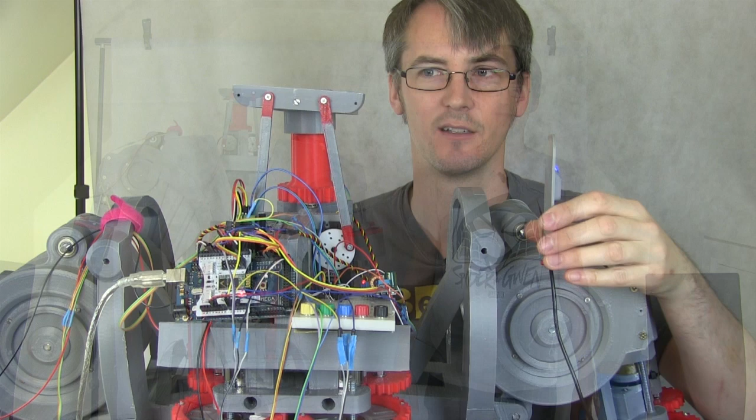This Ultron project is a real robot which actually moves with motors and electronics. It's going to be partially driven by a motion capture suit, but with its own AI in the middle, so it'll only respond if it wants to based on sensors from its environment, making it quite socially interactive. Have a look back on the previous parts to see me making the head and the arm move with one of the motion capture sensors.

That worked out pretty well, so you can imagine what it's going to be like when it's all in motion. I was going to do some more parts like last time, essentially cosmetic parts that fit in under the arm and some of the conduits, which are going to carry cables.

So again, those are practical cosmetics like the parts I built to house electronics last time. But I've actually decided to give that a bit more thought. This time I'm going to work my way up and try and put the head on, or at least try and design that, and that's going to be quite interesting.

There are some facial features in the movie that Ultron has around its lips, so it can move its mouth, its jaw, and also its eyebrows. It doesn't have too much else. But I'm going to attempt to make some parts that are flexible, printed in NinjaFlex, so we can try and put those features in.

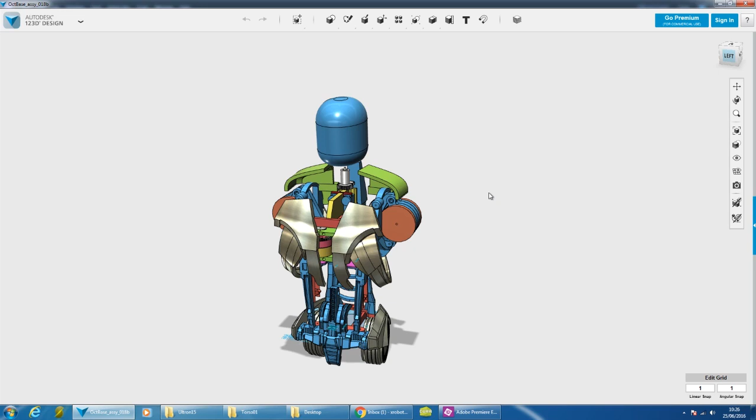We're going to look at the head, so basically this is the placeholder I had for the head. It's a bit big for Ultron's head - Ultron's head's a bit of a pea head really, stuck on quite a long neck. But I'm going to start with that to actually plan what the head is going to be like, and probably use this part and cut it up to try and make it shaped like Ultron's head.

Now I'm using Autodesk 123D Design, which is free software. It's not particularly good for surface modelling - in fact, you can't really do surface modelling. It'd be much better to model this in Blender or something else, but I'm going to try and do it in this because it's free and I know how to use it, and Blender is quite a lot to learn.

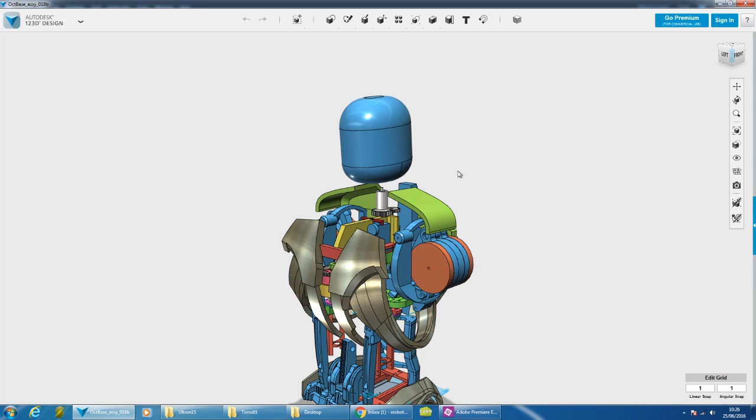Here's the head on its own with a bit of the mechanism underneath it. So this is the gimbal, which allows the head to rotate in all directions, and obviously it's on a rotating thing which is controlled by a motor at the back.

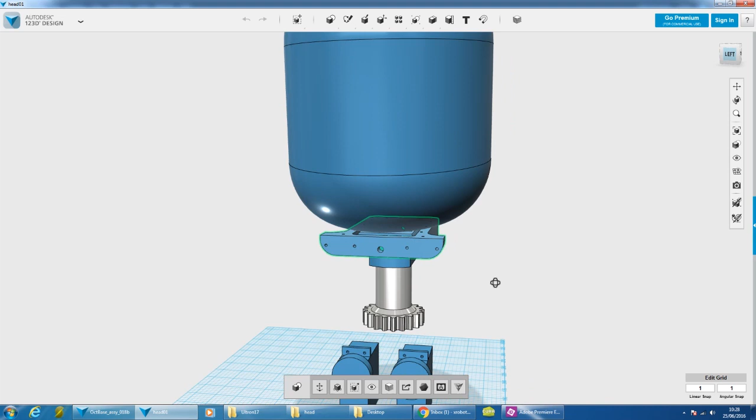So that's already looking a bit too big for the sort of chin and neck there, so this piece is probably going to get removed and made a bit smaller to match the actual head cosmetics. But I'm going to start with this shape, as I say, to try and model the head.

Here it is, so I've just dropped that to the ground and levelled it up. It was angled forward slightly in the main piece of CAD, so I can start chopping pieces out of it. I've subtracted some parts, so this main face on here, I just subtracted a sort of curve piece that I made by getting a sphere and cutting it up and shelling it out.

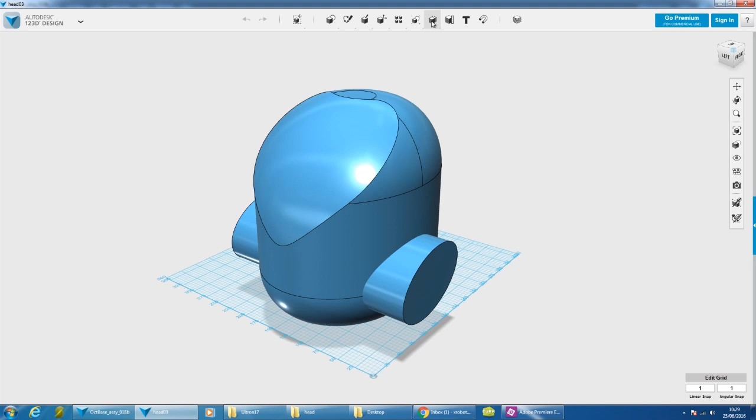Similarly, I'm going to subtract this part by using the subtract tool. So we'll just click on this and then click on this and press enter, and that removes the part. And we can do that to carve up the main piece there.

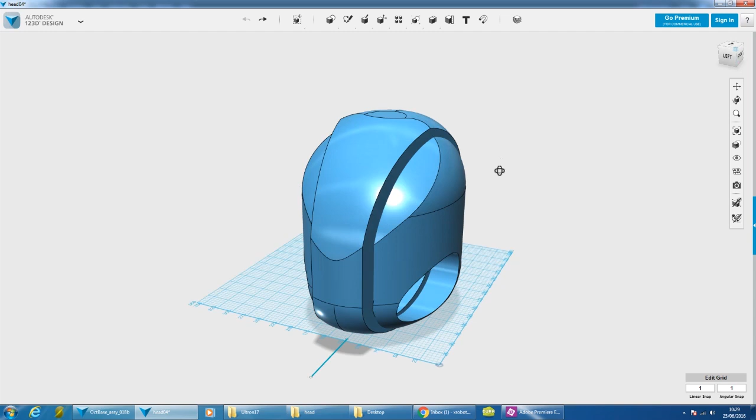So I drew some lines on the ground plane like this one and some others and split this up, so all of these are individual parts now. So I can try and get some better contour, and this central column, which is a bit like the shape of Ultron. Some of these bits need moving around and aligning, and eventually we'll split it up to make the jaw.

I've drawn another sketch on the ground plane, which is this one, and then just rotated it around so that I can get it at the right angle, and I've used that to split the solid using the split solid tool, and that's allowed me to cut this piece out.

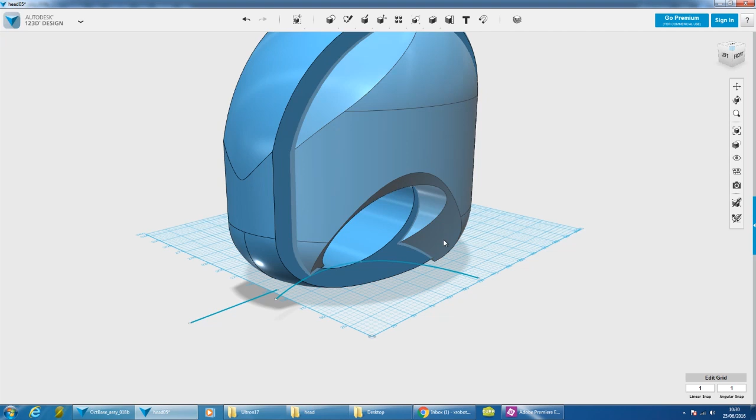And then I've just done a chamfer using the chamfer tool by selecting the edge and selecting a chamfer amount there, so we can go and contour up all of these pieces. And we're starting to get the look of Ultron there a little bit, I think. At least it's looking more head shaped.

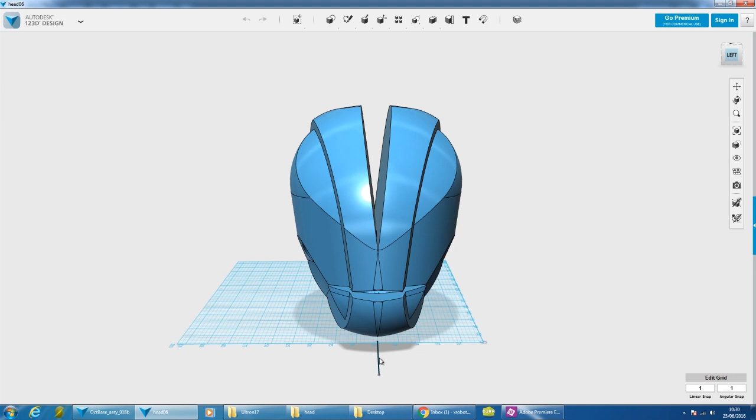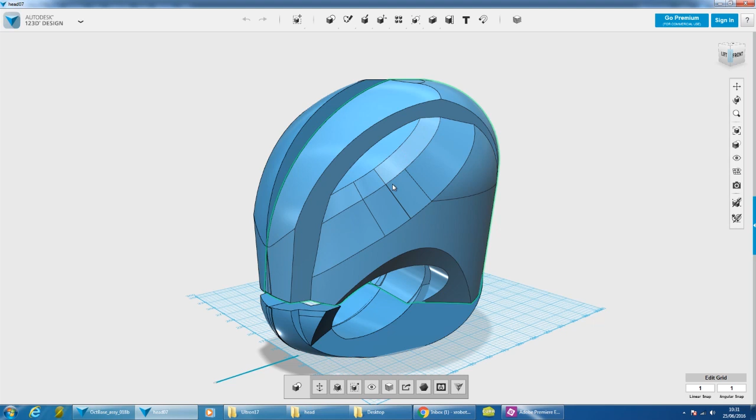I've now divided the head into 4 parts by drawing sketches and splitting it up, down the middle and also on a horizontal plane. Then I've taken these parts and rotated them slightly to try and get the right shape, giving a wider head at the top and a smaller jaw. I've then used the chamfer tool again to chamfer these edges to get some nicer contours.

Already it's starting to look a bit more like Ultron, I think. I want to fill in the gap in the middle, so I've put this extra object here and used the project tool to project this edge onto it. We can do that by selecting project, selecting the face, and selecting what we want to project, which draws a contour onto this piece. You can see that in green there.

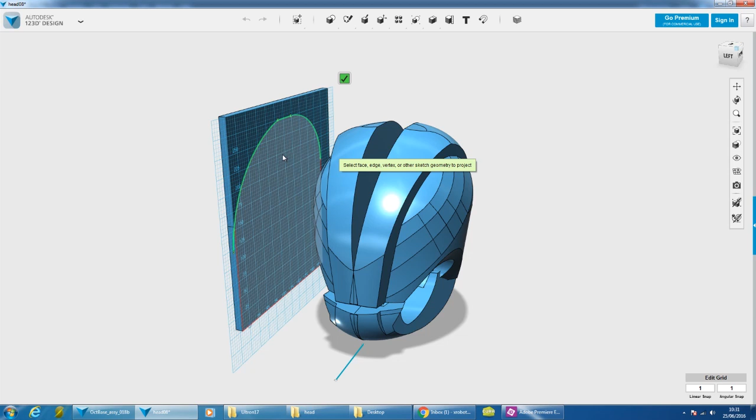I've then used the split solid tool with the green sketch to split the solid, allowing me to cut a piece out that perfectly matches the contour to fit in the middle. I made that piece a bit wider, then basically tried drawing a sketch along here and adjusting it many times to cut this out.

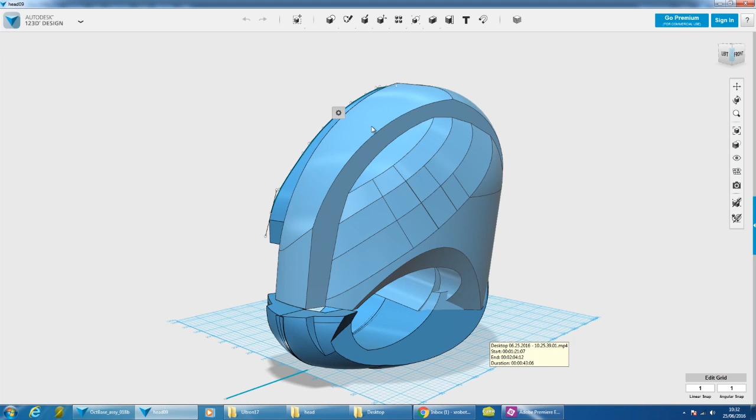I want to cut a piece off the top of the outside parts, so I used that sketch drawn on this straight plane in the middle, splitting the solid with the sketch and doing this multiple times to cut a piece off and then deleting it, through trial and error again and again trying to contour the front of the face correctly.

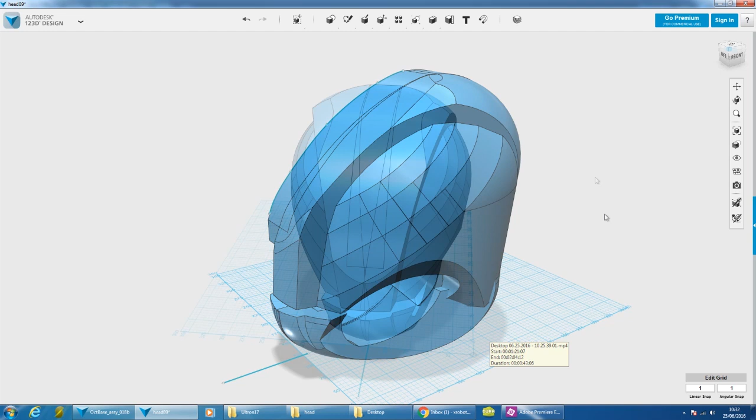I think I've got the right contour there, and I've done the same with that middle section, so all of those match, meaning I can merge them in. I've also put an extra chamfer down the side of the face.

I've done some further changes, and I think I've got roughly the right shape there. We've obviously got the separate jaw part, which I've coloured in separately. I've done a bit of scaling on that and added some bits and pieces.

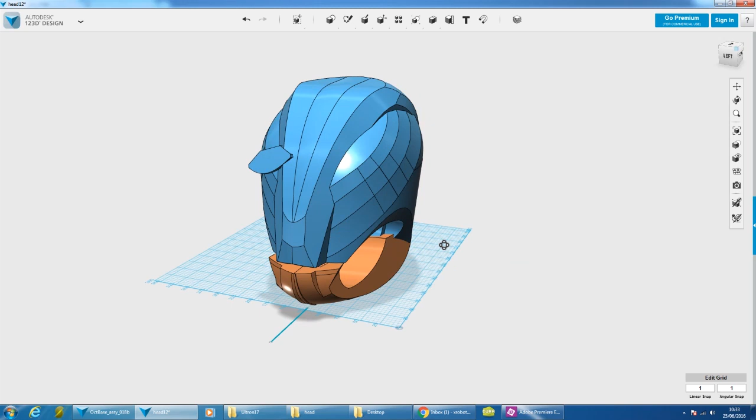We're now going to try and cut out the eyes and put the features around those eye sockets. So what I've done here is drawn this piece, and I'm going to stretch it out and try to locate it, then subtract that from the main structure to make the eye holes.

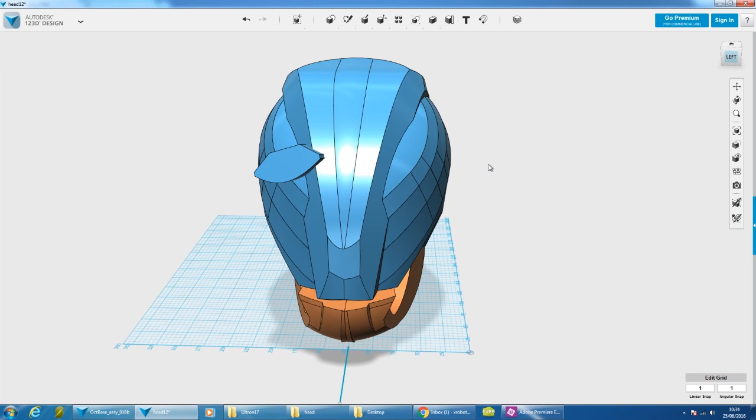Obviously this takes quite a bit of messing around. I'm not particularly good at freehand sculpting, so I've looked at quite a lot of reference pictures and tried to just rotate this around and get it in the right place to make the eyes.

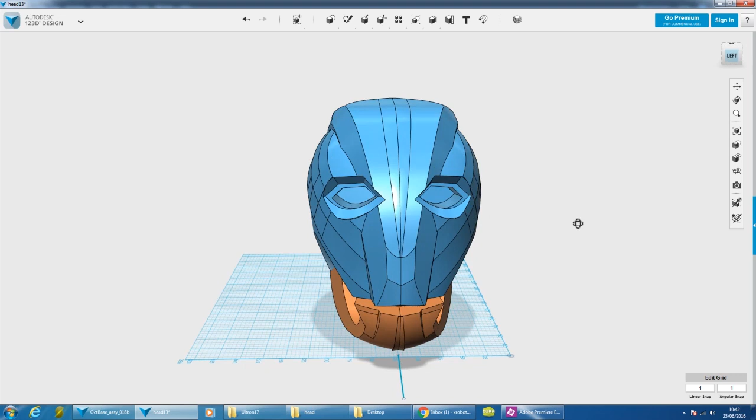I think those are probably in the right place, and I've subtracted a bigger piece as well and also chamfered some of the corners to make the bigger eye socket, so we've got that really narrow part in the middle followed by a bigger eye socket that gives more contour to the front of the face, and we could further contour those as well.

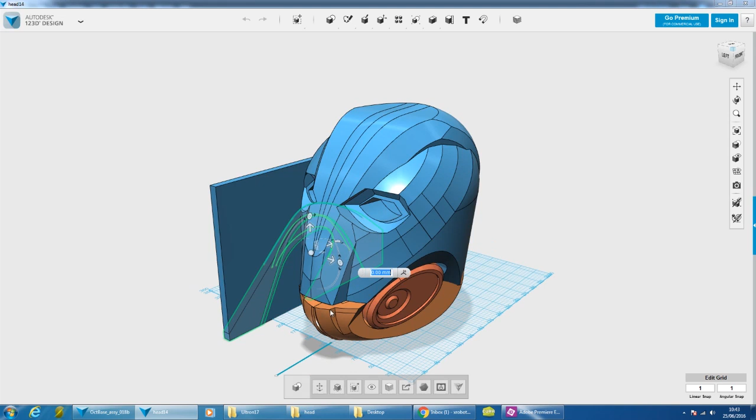I really want to put some parts on the cheekbones, which are going to set it off and give it that Ultron look. So what I've done here is again projected some of these lines onto a piece here, and then I can take this, move it over and use that merged in, moved around and put at the right angle to make up a bigger cheekbone part.

Here are the pieces I decided to keep and merge in, and you can see they very much match the contours I already have on the face. Obviously I can mirror this to both sides using the mirror tool, so it's starting to look a bit more like Ultron maybe.

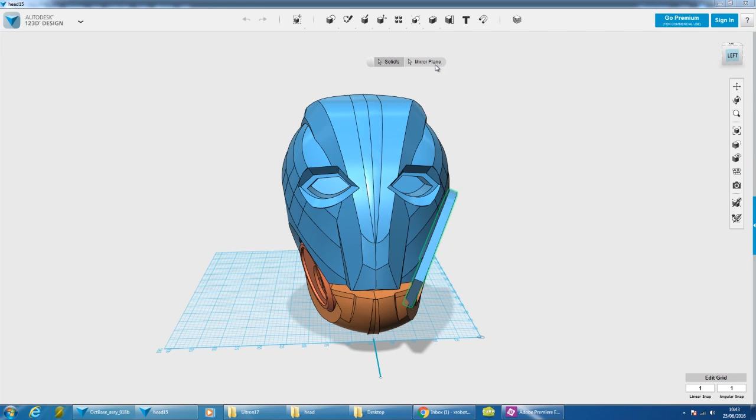It looks a bit funny in the mouth at the moment, but we need to further mess around with those by making them bigger and smaller and probably adjusting the angle of them to try and get that to be the cheek scoops that we can see.

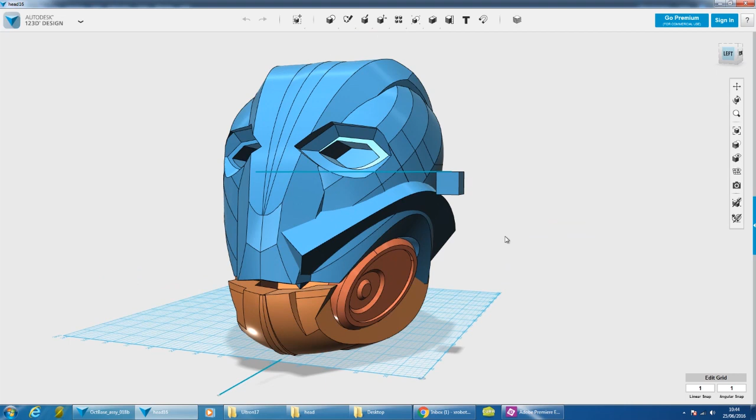So I've positioned that as best I can. It probably needs some further tuning, and then I wanted to try and contour it better to match the face. So what I've done here is just put this cube floating in mid-air so I can draw a sketch on the top plane, looking down from the top, and then try to cut this. The problem I've got is that of course it takes the sharp edge away.

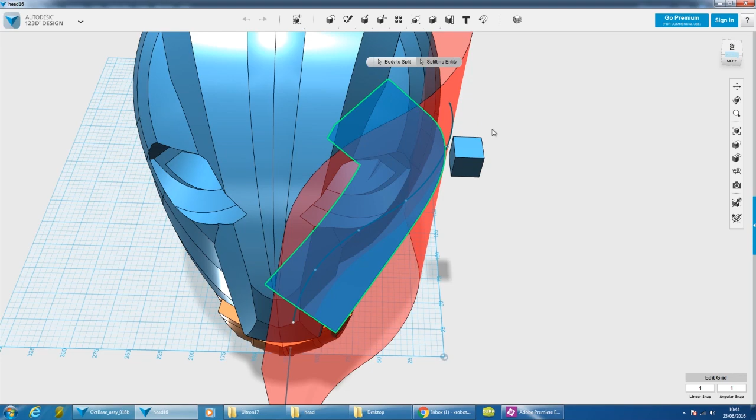If I cut a piece out of it and delete it, I don't get the right shape anymore, so in the end I decided to just scale it and position it and keep that sharp corner. I've also rounded off the back by using the fillet tool to take away that sharp edge so it matches the contour of the face.

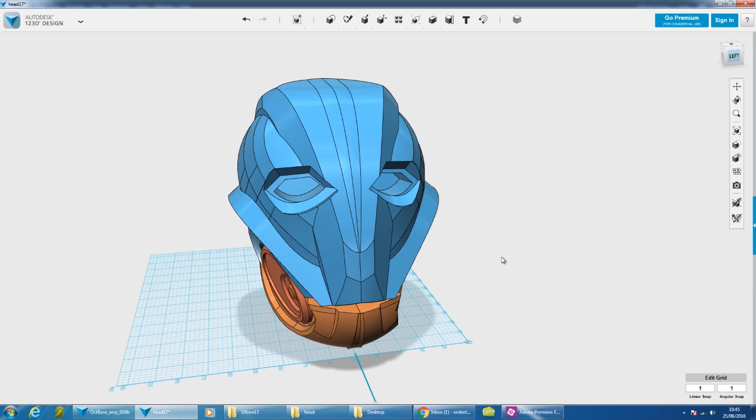I think that's now looking quite a lot like Ultron, or something that lives under the sea - I'm not sure, it looks a bit like gills. So I've put this block down and drawn some circles, and I'm going to cut away a piece here and put the sides on, which are basically Ultron's ears, and I think that's really going to set it off.

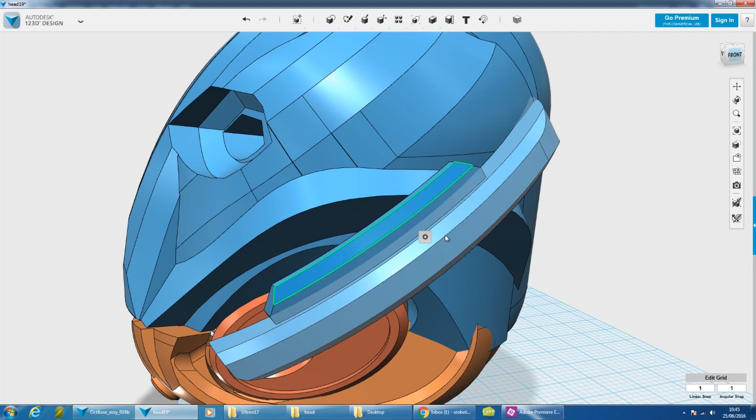After quite a lot of messing around and chamfering edges and contouring things, there's another corner I've cut off using the fillet tool and various other things. I think I've got these positioned right - I'm pretty sure I've got something that looks a bit like Ultron.

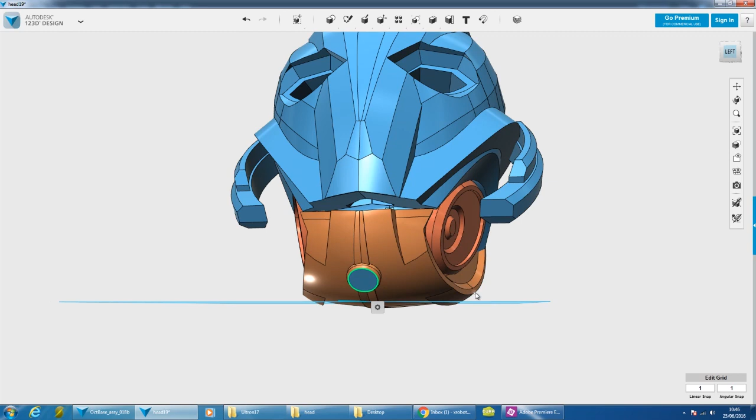That says Ultron to me now, especially looking from the front. If you can imagine its mouth opening, I've put this little circular thing in the bottom it has, and various other things. We can see that's looking quite a lot more like Ultron now - I think having those ears on has really set it off. The back still needs some more attention, but pretty sure we've got Ultron now.

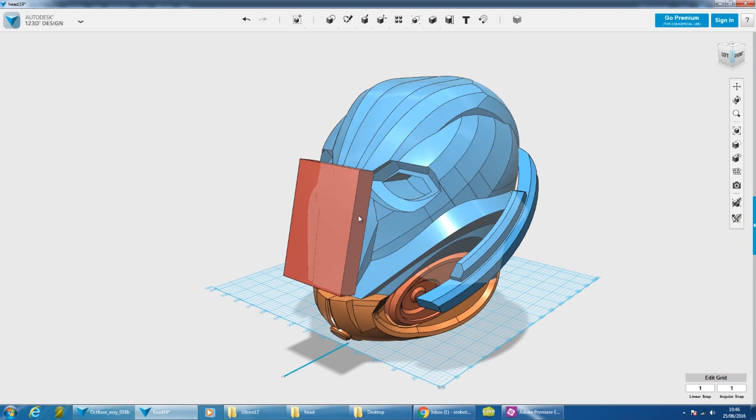I think the nose is a bit pointy and sticks out too much, so basically I've got this part which I'm then going to subtract using the subtract tool again, and we can make his nose a bit flatter. I think that really looks a bit like Ultron now.

I've repositioned those a bit and also messed around with the nose a little bit more. Pretty happy with how it looks so far.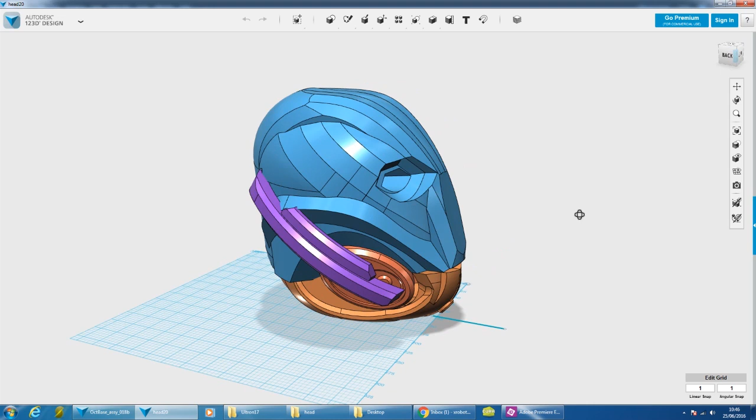I think we should put it back onto the main piece of CAD and see how well we can scale it. I thought before we do that I should make it all a nice colour, so if we go to the materials thing here, we can basically make it into different types of metal. I've chosen stainless steel, and I've also put some separate bits coloured red in the eyes. So yeah, that definitely looks like Ultron now to me.

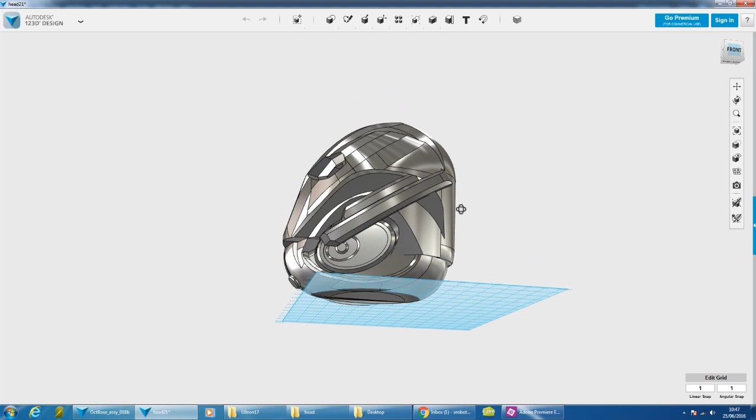I've reinserted that back into the CAD we started with so I can try and scale it. I'm not sure, it's really hard actually to decide what size it should be - I've brought it down by about 3% from what I started with.

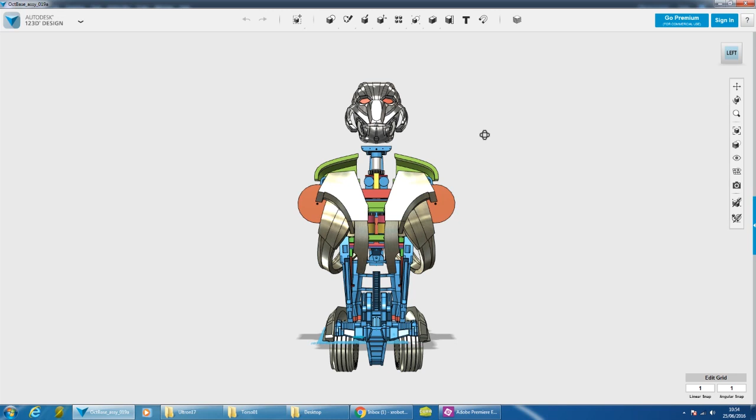So as I said, Ultron's head is kind of like a pinhead on a very long neck. It does look incredibly high compared to the arm joints, but actually they are pretty low, and there's a massive shoulder bell that comes over those on each side as well. And Ultron's head is kind of up on this thing supported by conduit and stuff. Compared to the back chassis, it's about the right height compared to reference pictures I've found and so on.

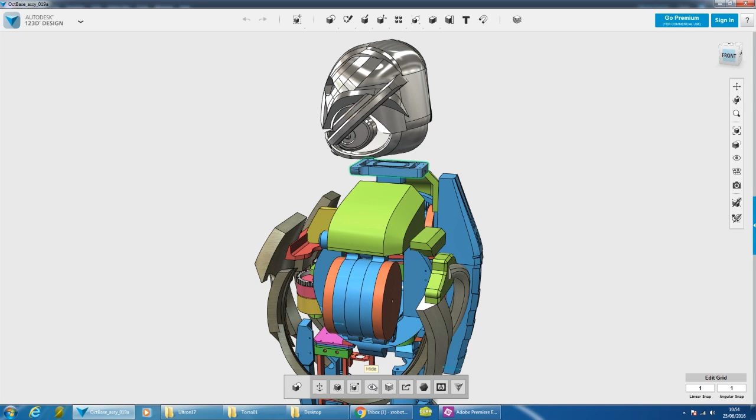Now you have to bear in mind this gimbal thing won't be here. There are conduits that run down either side of the neck and a thick neck in the middle, so at the moment it looks a bit like it's floating there in space, which it is, but obviously there'll be supporting neck parts, and the parts in the front here, the clavicle, and other various parts that fill in this massive hole in the front of the chest.

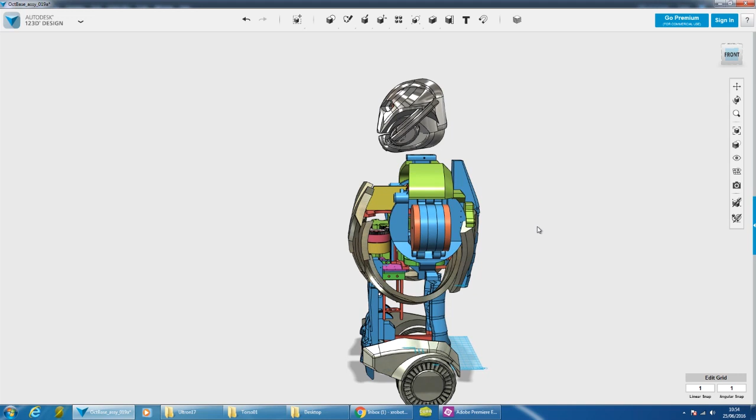Now this Ultron robot is sort of slightly wider front to back than it should be due to the arm mechanism, so it looks a bit underwhelming from the side, although I think its height is okay. But from the front, if you look at pictures of Ultron, I'm sure people will disagree and say the head needs to be slightly bigger maybe, but I'm pretty sure I've got it just right there, and that's the size I'm going to proceed with.

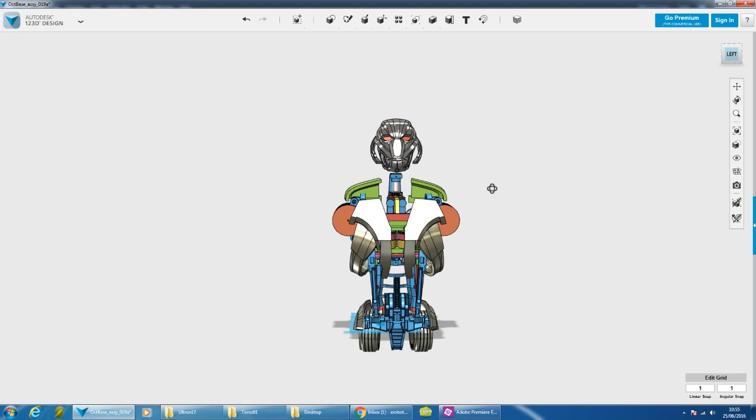I think obviously it is quite thin, but with the kind of earpieces on each side, if you take into account that width, then I think actually it probably matches. Although if I look at it with fresh eyes, sometimes it looks a bit small, but then if I look at reference pictures again, it is quite small, so I'm going to go with this size.

So here it is back with the neck gimbal mechanism, and as I say, this outside part is going to go. I need to retain the two holes that are closest for the pivot points that go to the servos.

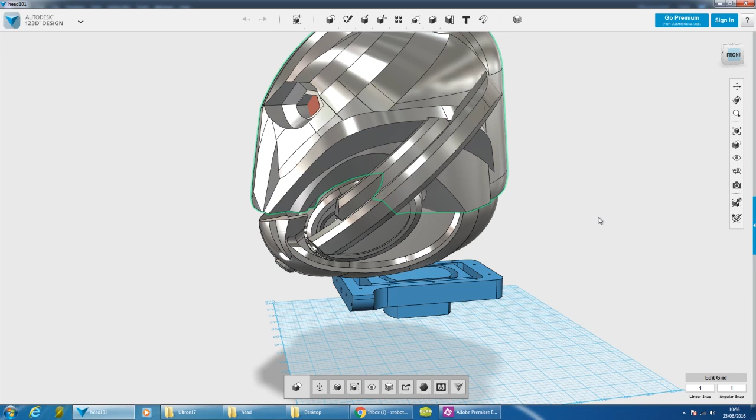The outside ones are not used, so that T-shape can be reduced. What I need to do is make sure the jaw can move up and down around this. So the gimbal and the neck need to be attached to the top of the head, otherwise its head is going to flip up and down as the mouth opens, and the jaw needs to move down around this.

So probably what I need to do is preserve the hinge points and the pivot points, get rid of that, and then build a piece that attaches to the top, once I've hollowed it out, that actually gimbals around this piece. So now we need to turn this into a mechanical assembly that works, work out where servos and things are going to go for the jaw, and also which parts are going to be printed in NinjaFlex.

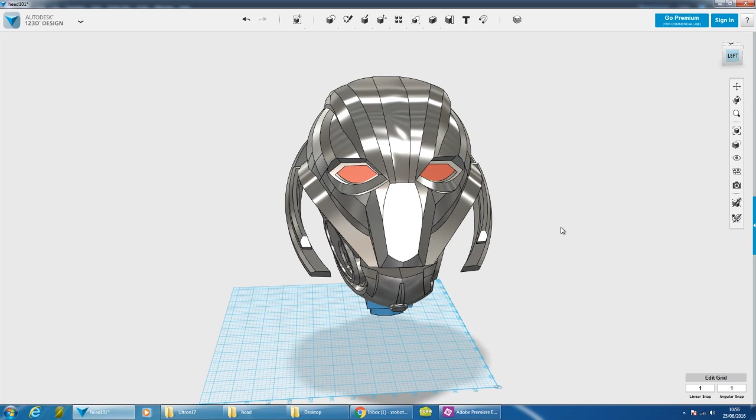There are quite a lot more dividing lines in the face, so we need to make sure the top and bottom lips can move and flex, and hopefully around the eyes, those sections, or at least some eyebrows that can move, even if there are splits in it and those parts move independently, so we can get some facial expressions.

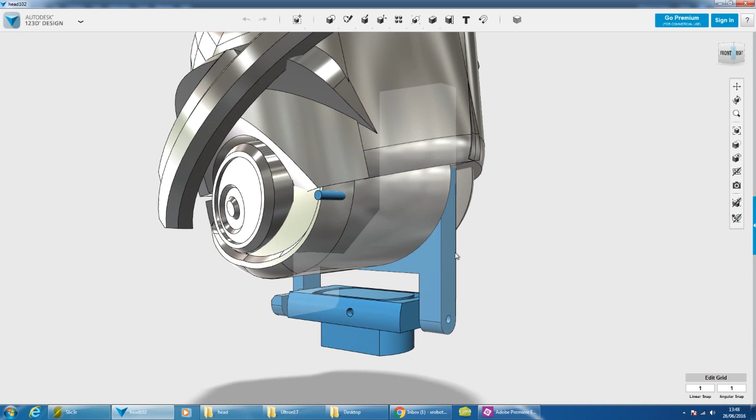I've started by sorting out this jaw hinge mechanism, so I've replaced the outer gimbal with this blue part that goes right up inside the head. That'll be fixed up in the top of the head, and I've now got a slot in the bottom of the jaw here so that the jaw can hinge around it using this blue axle as a pivot.

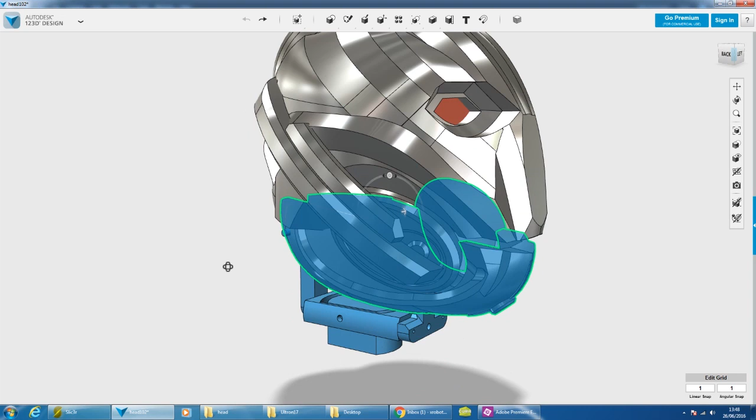So we can simulate how much the jaw can open by using Smart Rotate, by selecting that face to rotate around, selecting all the items we want to rotate, just getting all of them, selecting the axis, and then we can say put in 6 degrees, and we can see that jaw drops down.

I think that's enough for speaking. If I redo and undo, we can see the motion there. It can shut a bit more than that as well, so I think that's going to be sufficient.

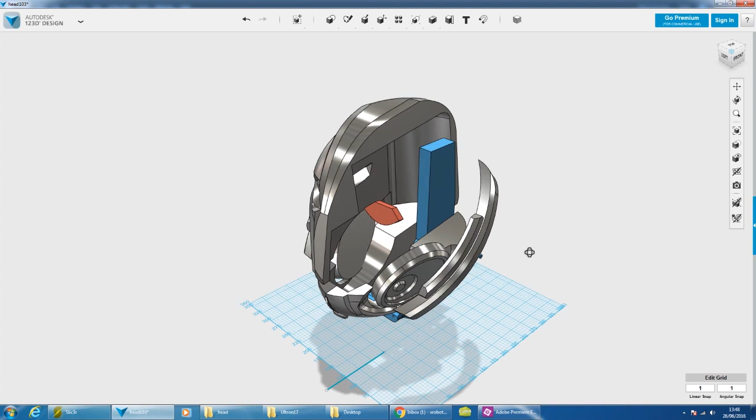I've now split the head in two so we can see inside there, and you can see I've hollowed out the middle, and I did that by subtracting the jaw and then pulling all those faces up. It was a bit of a challenge, but I got there in the end.

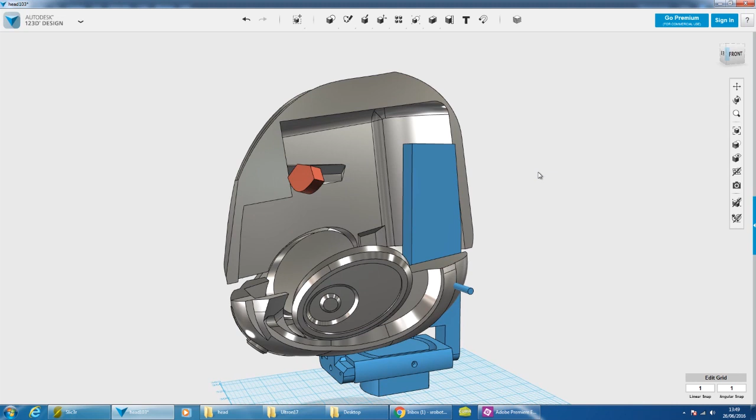I drew some other sketches as well and cut round the eyes there, otherwise we end up with really big eye sockets and don't preserve these faces. So we can see there that the blue thing runs all the way up, so I just need to make a cap to sit that on so the top of the head can push down onto it.

I've now put an extra solid piece in the back of the head there, so obviously this will be in 2 halves, and this thing will slot into a cavity so the top of the head can literally lift up and be pushed back down onto that, and as I say, the jaw will hinge around it as well.

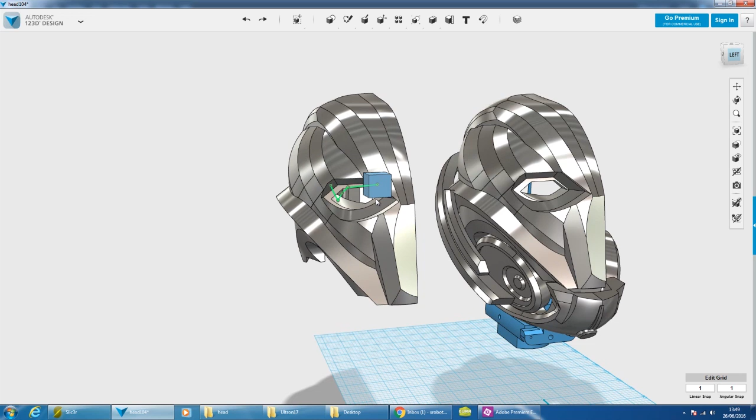I want to cut out the eyebrows, so what I've done here is made a copy of half the head, and then I've again projected some of these lines onto a plane here, and I'm going to use that to cut out a piece to make an eyebrow that's going to be animatronic.

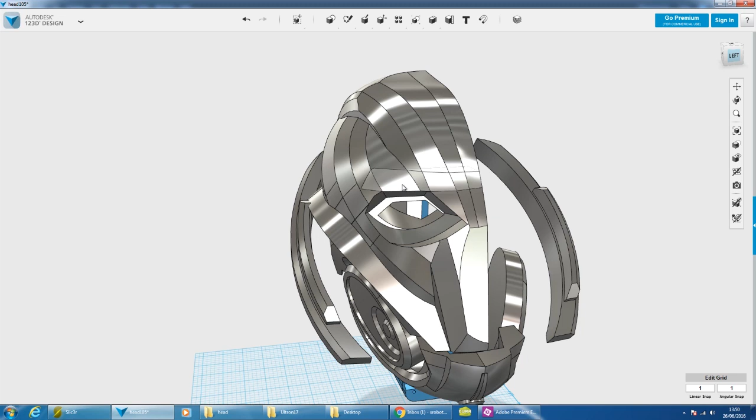Here's the piece I'm left with, which of course perfectly merges in here, if I can get it in the right place, leaving me the eyebrow shape. So what I need to do now is subtract that from the main head and then keep a copy of it, so I've got a piece that fits in a hole in exactly the right place.

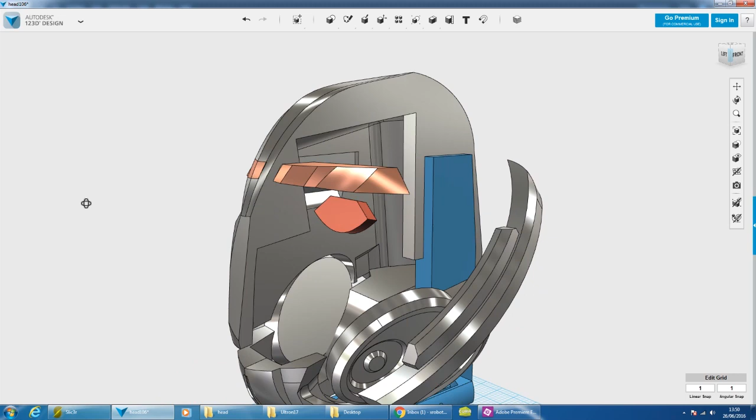And here they are. I've coloured them in a different colour, but obviously they'll be the same colour. And if I hide half that head again, I've actually got a channel in here where we can get a servo in to push a rod up and down, so I think the middle of those eyebrows are going to be fixed and the outsides will flex outwards, and they're going to be printed in flexible filament like NinjaFlex.

So I've just coloured those a more sensible colour. They're silver or some other metal off the materials menu, but at least we can see they roughly match, though they're separate parts. I've also done the same thing with the top lip now.

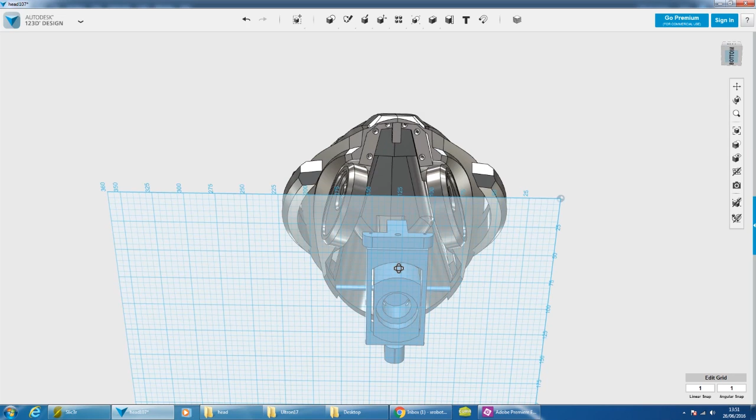So this is again going to be flexible and pushed in and out at the middle by a servo. So if we just get rid of the bottom jaw, we can see in fact I've left screw holes here, so I can screw this piece in and that will match screw holes in the top jaw.

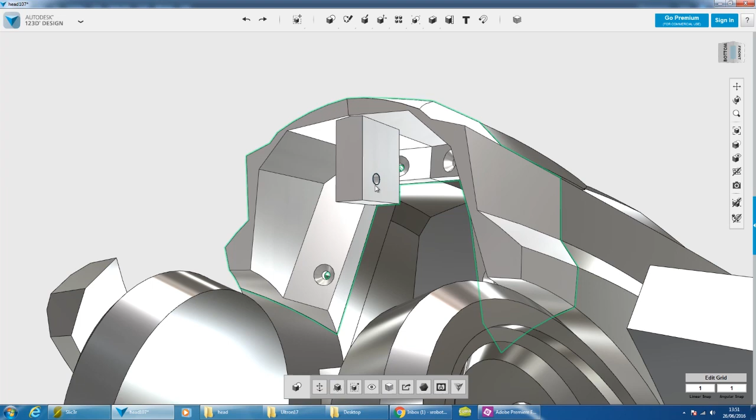So I can actually print that part separately and then attach it later, and if it's not thick enough or thin enough, I can experiment and adjust it so it's flexible enough without reprinting the whole thing, as a hybrid print. There's a hole here which will probably get adjusted for the servo to push and pull the middle of the lip, and I've done the same with the bottom lip as well.

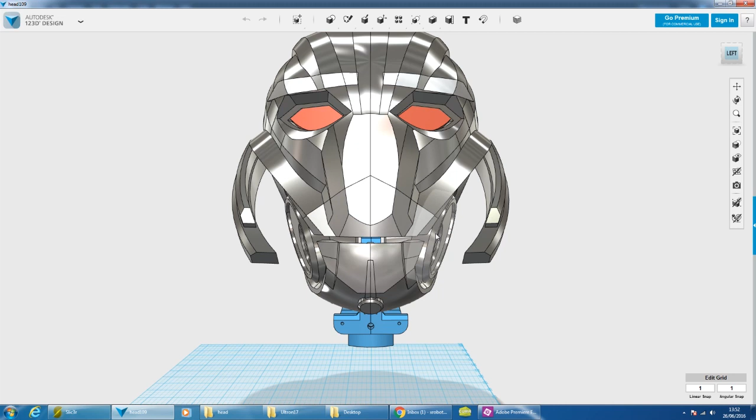So let's get rid of the top of the head, and we can see we've got a similar arrangement with a servo point and some screw holes that screw through into the bottom jaw. I've just adjusted those lips so they're flat. That's for two reasons: one, so it looks more like Ultron, and the other is so I can print those parts flat on the bed.

I've also made some minor adjustments to where the servos attach. You can see I've now got a variety of holes in there, and I've made these things slightly shorter, especially the back one, so the servo point is nearer the lip and this whole block isn't sticking out as much.

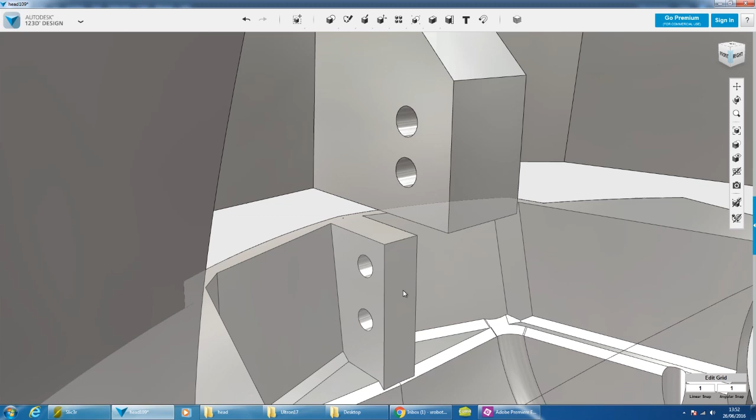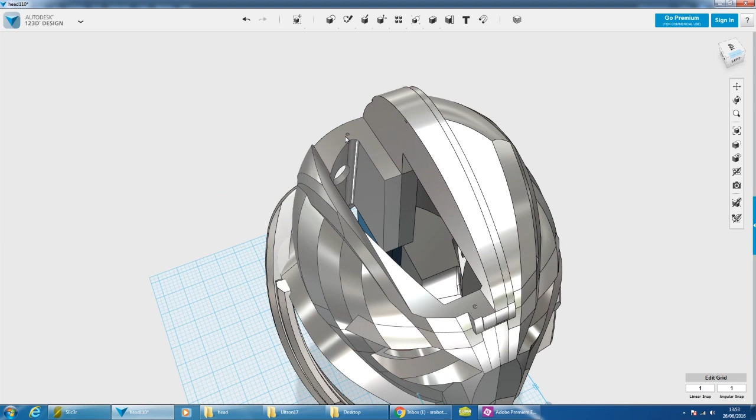Ultron has two red lit sections that contour the top of the head, so what I've done is cut off the top of the head, leaving a channel - you can see one here. It's about 6mm wide, so I can fill it with red LEDs or something else to illuminate it. That means I can lift off the top of the head to get inside. I've allowed some pegs here to align it so it just pops back on, and also illuminate those channels.

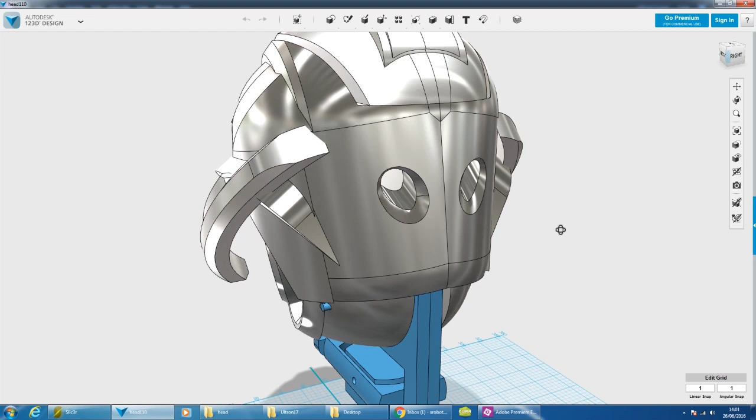Around the back of the head we're going to need another panel, a bit like a mullet, that basically matches the spine contour as the back pieces come up on the back of the body. For now I've just left two holes here so I can get cables in, possibly some conduit can run in there. Haven't really decided how it's going to look yet, and that's for access to the electronics. So there will probably be a cover over those, or some other feature that hangs down the back.

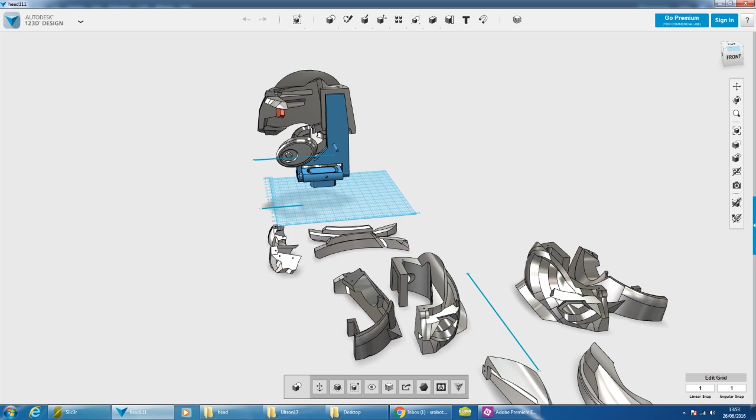Printing this thing is a bit more of a challenge, so I've actually cut the sides of the head in two, to get two flat surfaces. I was going to print the two sides with the inside faces facing the print bed, but that would have meant loads of support material to hold it up. So instead I've decided to put an extra seam line in and print the top and bottom of the head separately. That's the very top of the head, and over here we've got the jaw, which again is cut in two to give flat surfaces.

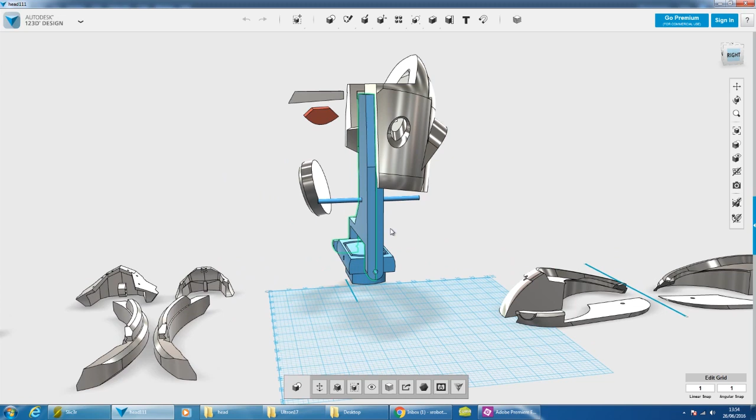We've got the NinjaFlex parts here and the ears which I've added on. I've still got to do something about the mechanism, which is in blue, to print this extra gimbal part, but again that'll be printed in two parts, so they're both flat on the bed and any warpage gets taken out by the two being attached together.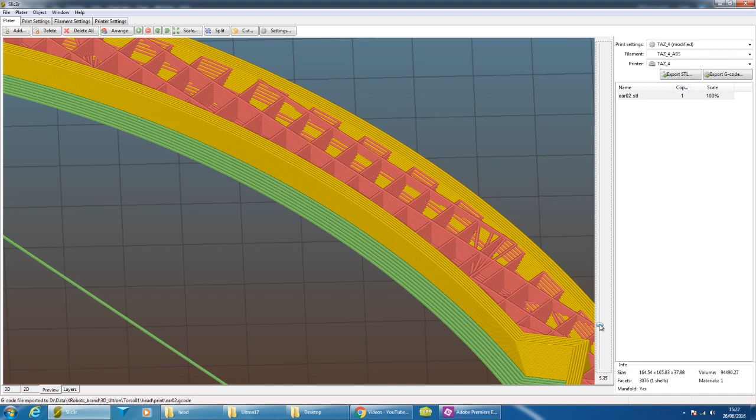I've got one of the parts in Slic3r here, and I'm using slightly different settings to usual - I'm using a 0.2mm layer height instead of 0.3, and 6 perimeters with an infill density of only 10%. Normally I do about 20 or 30% and 4 perimeters.

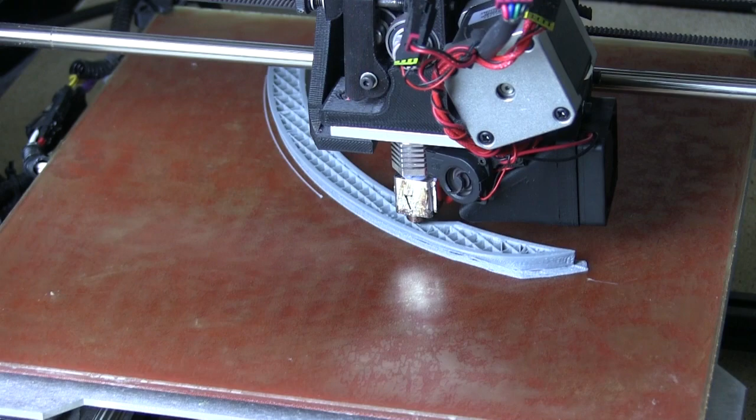The perimeters are basically the amount of shells around the outside, so 6 should make much stronger parts, and obviously the lower density infill will mean they're lighter. It also means the top surfaces should be better as parts come in like this, so because we've got more perimeters on the slopes and things, we should get a better quality print. So they should come out nice and light and really strong and pretty good quality.

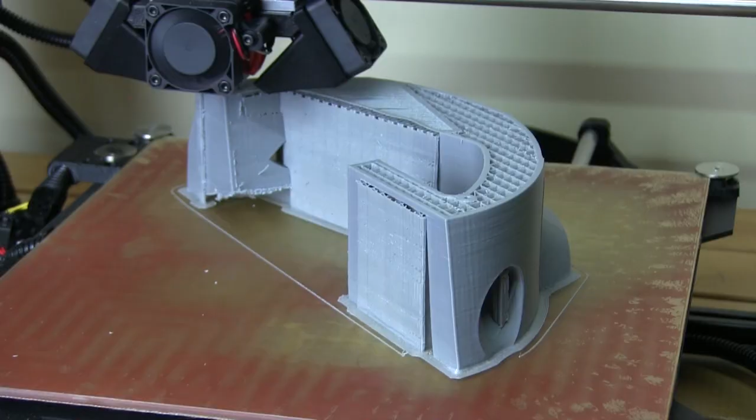Here are some of the 3D printed parts. I've stuck some of them together and some of them I haven't yet. So the top of the head, the two parts are stuck together, and that's quite good. As I said, I've got these holes here to put pegs in so I can locate those, and I'll probably make sure it still lifts off so I can get inside. The sides of the head here have come out pretty well.

I've still got support material to remove where the rubber eyebrows are going to go, and in the eye socket. These took 14 hours each, and that's with a 0.2mm layer height, with 6 perimeters and a 10% infill, so they've come out pretty well.

Still the support material for that eyebrow channel, but we've got the 2 halves there. These are the next parts down, so these go upside down underneath the top of the head, and this is where I've got the removable jaw part.

So this is the sort of top lips, if you like, which I've taken support material out. It's NinjaFlex, of course, so it's flexible. I've taken half the support material out, the other half I still need to take out, and those screw holes will neatly fit in there. That's the top lip, with a rod that will pull from a servo I'll mount later so that its lips can flex all around.

And here's the bottom jaw, which is stuck together out of 4 slices. It's a bit messy on the bottom, but all we'll really see is the front. And again, we've got this other NinjaFlex bottom lip that will neatly screw in there.

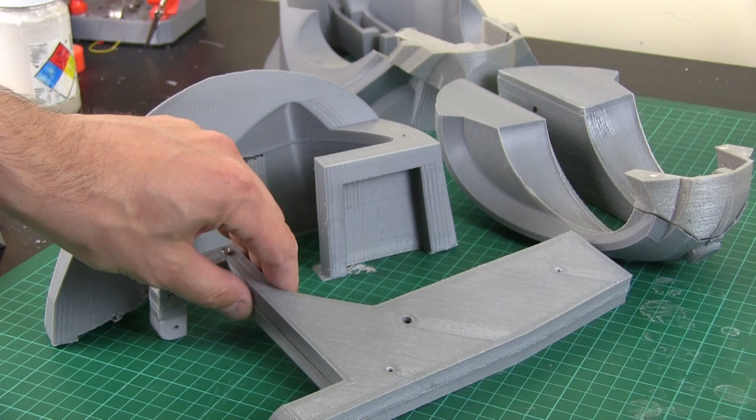The whole thing is mounted around this alternative head mounting stick with the jaw pivot. If we look in the top of the head here, we've got this piece that this fits into, so that everything will be mounted around that and the head top can lift off. So I'm going to get some more of that assembled and we'll see how it looks for size.

So there we go, let's just pop that on there. Good, okay, so the jaw is temporarily attached at the moment. The rod in there is too thin, so it's a bit wobbly, but it does fit, and it fits inside the top of the head, which is important.

I think that opens enough there. Obviously, the lips are flexible. They're a bit stiff, so I might have to make thinner walled ones. But the aim is, of course, a servo can push those in and out independently so that we can get some sort of speech pattern or something.

It'll probably just be to do with facial expressions and emotions, and I haven't printed the eyebrows yet, which I need to work on. I'll remember to make those nice and thin so that those can flex in and out, so a combination of the mouth and the lips and head gestures, and we can get some quite good facial expressions.

So I still need to put obviously the animatronics in, which I can solvent weld in. All of these parts are ABS. I can solvent weld in the servo brackets to lift the jaw up and down and move those features. They can all be fitted inside at a later date.

So I'm not sure if it looks a bit too friendly at the moment. It doesn't look exactly like Ultron. It looks a bit more like a friendly teddy bear, but I think perhaps when its eyes are glowing red and it kind of turns around to look at you, then perhaps that'll be a bit more scary.

I still have the sides of the mouth to put in there as well, so at the moment we've just got this big hole, so that'll be a bit more enclosed, but I'm pretty happy with that for now. It seems to have come out okay, and I think it matches the scale of the rest of the robot.